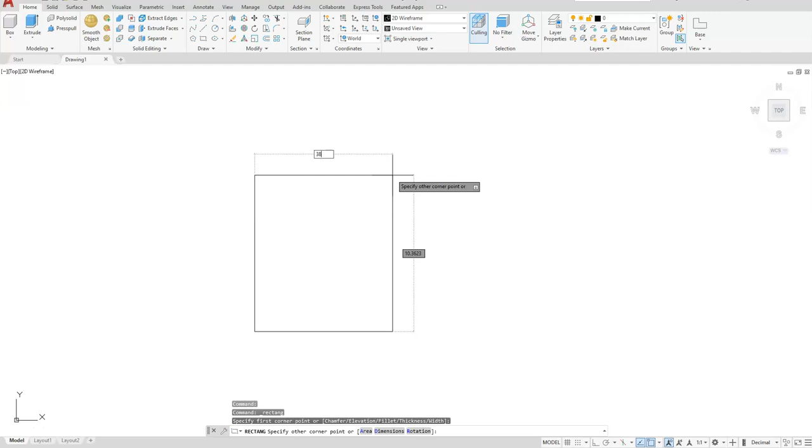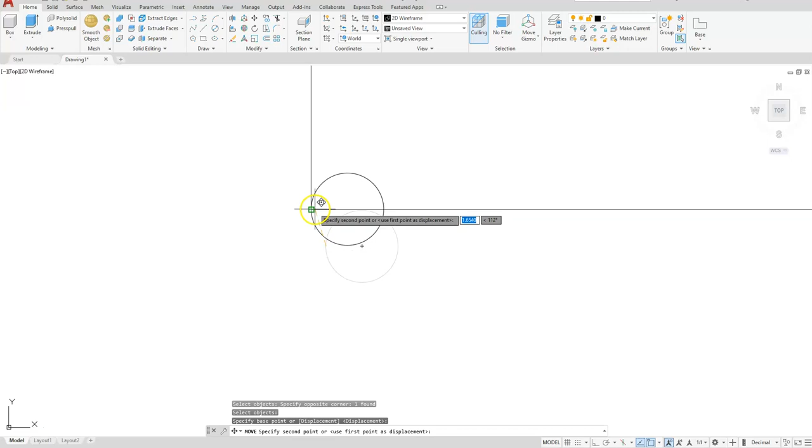Okay, so let's start off with a rectangle. And my other point is going to be 38, 56. Now I'll create a circle that has a diameter of 3. I will move this circle from this quadrant to this endpoint. Let's take a look at this in an isometric view.

And now we'll create the helix. Before I do that, I have to change my UCS since the height of the helix will go in the Z direction. So I'm just going to flip the handle by using a X90.

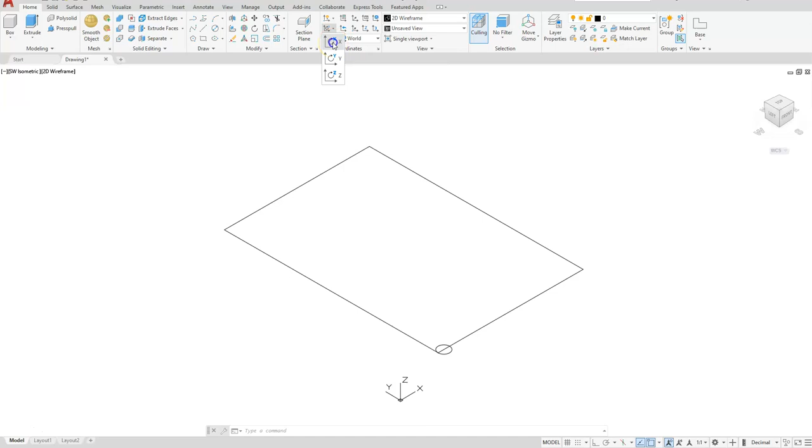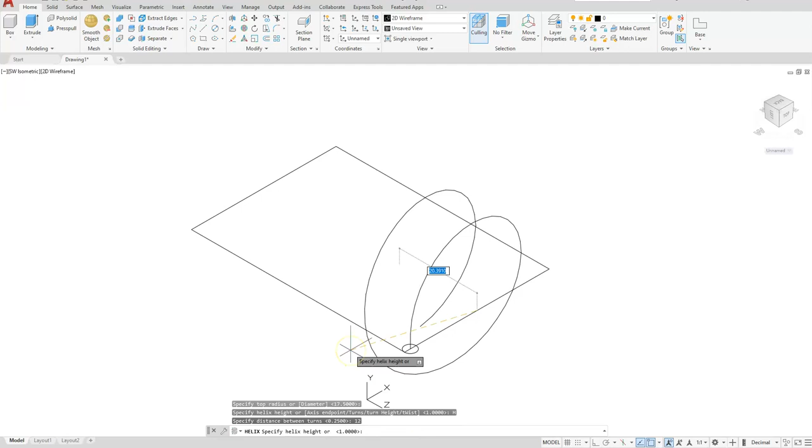Okay, let's create our helix. Start at this midpoint. Let's go to the center of our circle. Hit enter, we don't want it to spiral out. The turn height will be 12. As long as you make it higher than the 56, it should be okay. So let's make it 60. Let's flip our UCS back.

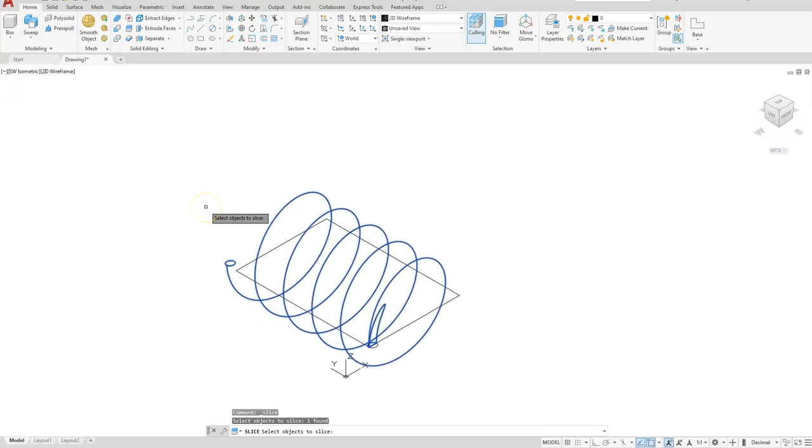Slice. Once again, I'm going to select the spring that I have here. And then I'm going to still use that parallel axis of the ZX axis. I'll select this endpoint and keep both sides. Go ahead and erase your rectangle now. Let's look at this in shades of gray.

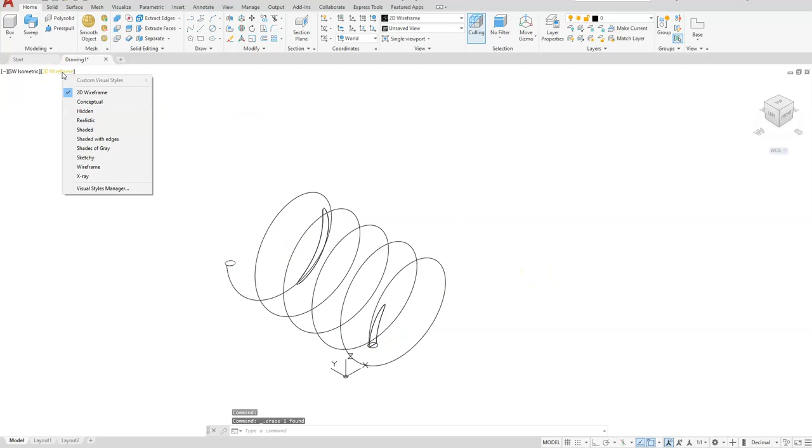And then we're going to delete the parts that we sliced between them. So I'm going to delete that part off the end of here. And I have another piece off the top here that I'll delete. Go ahead and save it. And name this one Spring.